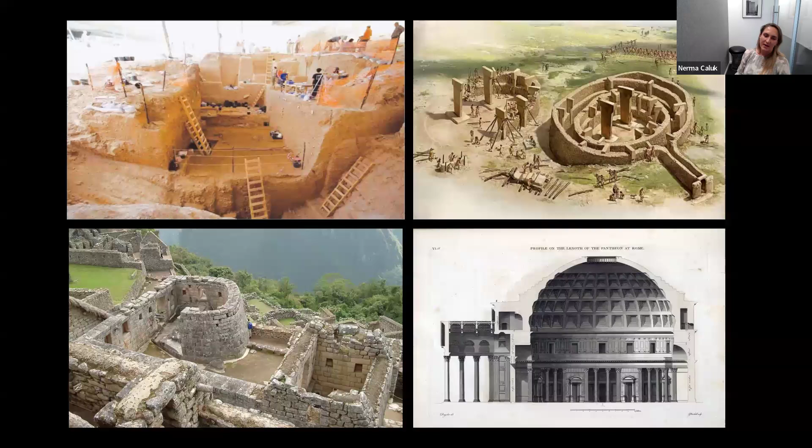Okay, so before we dive in and talk about how robots build stuff on moon bases, I want to talk about how we build things here the old-fashioned way, with blueprints, scaffolding, rebar, and very importantly, an unhealthy amount of coffee on construction sites. For thousands of years, terrestrial construction has been defined by this interplay of human ingenuity, craftsmanship, and the dynamic relationship between conceptual design and practical execution. From the limited shelters made of earth and stone to the sophisticated structures made of steel and glass that define our skylines today, especially in urban areas, our methods have continuously evolved, translating abstract architectural concepts into tangible reality.

Central to this process is a system of documentation, including the drawing plans, sections, and elevations that communicate the architectural vision, structural logic, and sequence of construction. These documents don't just describe a building and how it looks.

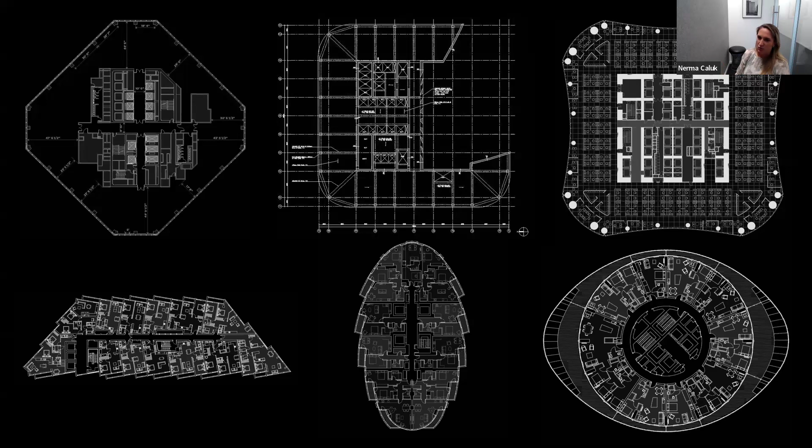They coordinate this choreography between the designer, engineer, and builder. On Earth, structural components are laid out based on these drawings, carefully measured and executed by a team of skilled laborers. Some of you are probably using robotics drawings as well for different component assemblies, or for assembly of rockets and drawing plans.

A good example is a building I'm currently working on, a couple of them actually, 5 of them in Santa Barbara. This is a perfect example of how we try to look into these plans, understand where the studios are, where the bathrooms are, where the stairs are, how everything coordinates together, and lay out the shear walls.

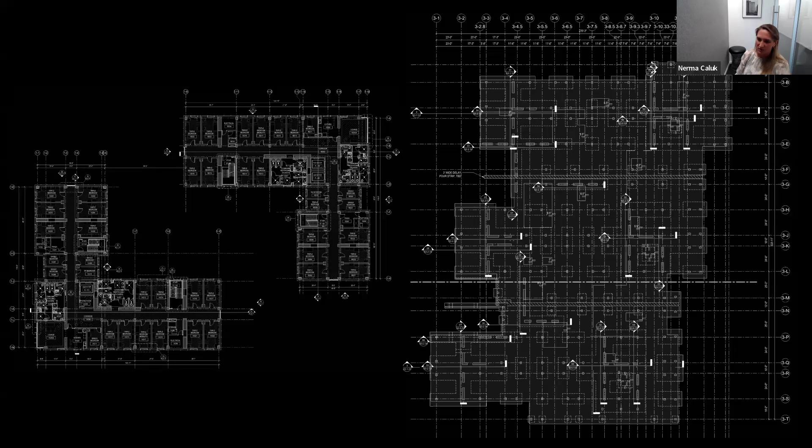We run millions of iterations, shortening shear walls by 5-inch lengths, determining where link beams will be located, and so many other components laid out on these plans, providing so much information for the actual humans to build these structures on site. But to build on site, we need temporary infrastructure like scaffolding, cranes, formwork, and so on, which serve as the physical framework that allows the building to emerge piece by piece.

Adjustments and improvisation do happen in real time. For example, a steel column can be shifted to fit an anchor bolt, or a rebar cage has to be modified due to unforeseen congestion. We build not just with precision, but with tolerance for error, because the human workforce is always present to adapt.

Sometimes the most critical tool isn't a BIM tablet we have on site, or a laser we use to measure things. It's the experience of the construction worker. It's the tape measure we use. It's a roll of duct tape.

It all depends. Construction is rarely as clean as the renderings, as you probably already know. But sometimes it does look like an actual rendering—there have been a couple of projects where I'm like, I don't know if this is an actual rendering or we actually built the structure. It represents an art form of orchestrating controlled chaos.

In many ways, we're building buildings on Earth not just through construction, but they're negotiated into place—that's how we approach these things. Over the last couple of centuries, these processes have evolved dramatically. Buildings have pushed these limits not only in scale, but also in complexity.

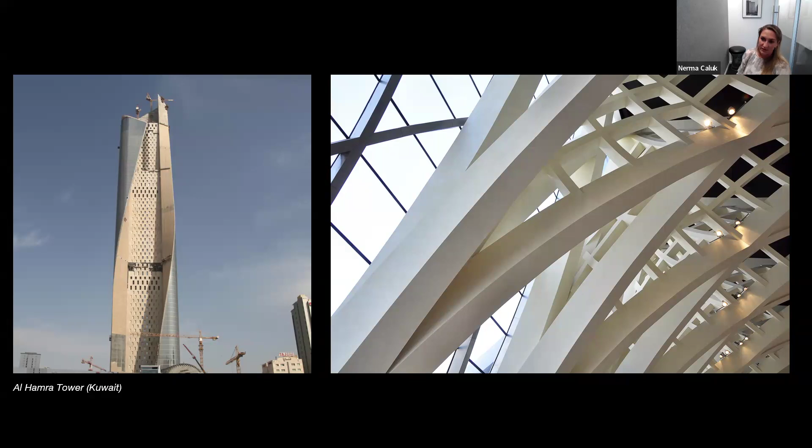An example is the Al Hamra Tower in Kuwait, a sculpted high-rise with a spiraling, carved form that requires an asymmetric load-bearing wall system, thickening dramatically along the tower spine going up to counteract lateral forces. Each floor plate is slightly different, demanding high precision layout and curved formwork, executed by a human workforce guided by both digital and tactile experience.

Another example is London's 201 Bishopsgate, where we see this interplay of large span steel frames and complex double-curved facade systems. The steel diagrids weren't just structural—they were designed to accommodate architectural transparency and pedestrian scale, demanding close collaboration between the architects, the structural engineer, and the facade consultants through the actual build.

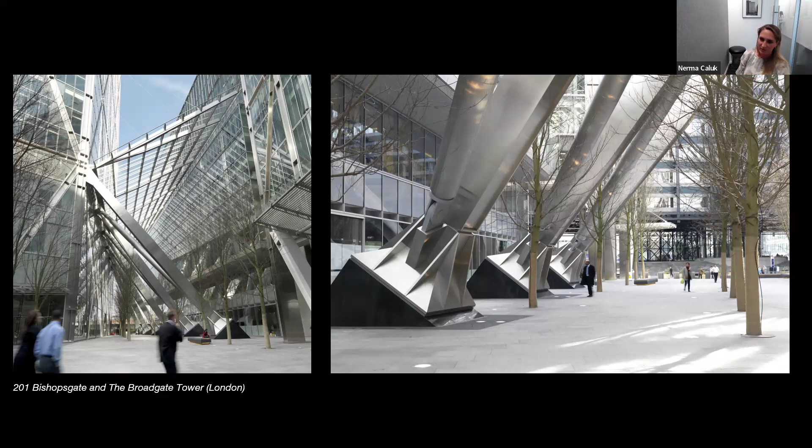This building is also located on rail tracks, so there were a lot of load combinations and load cases that had to be addressed. Tolerances were adjusted on site, and connections were hand-aligned. Again, human presence was essential.

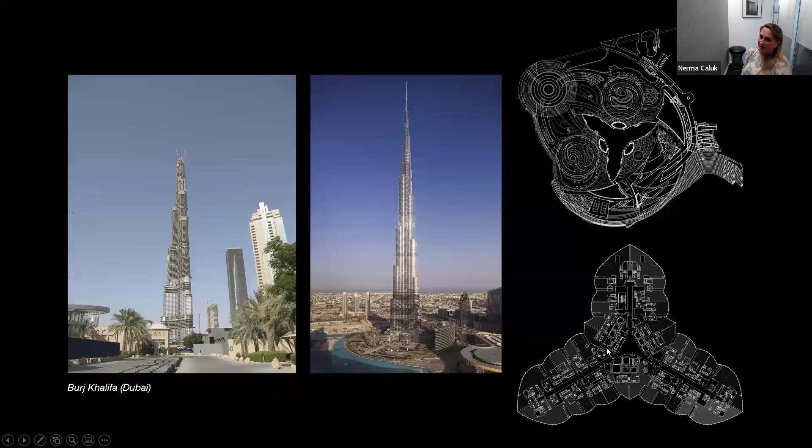At this structure at 830 meters, it required an unprecedented buttress core system to counteract the wind loads and gravity loads along its height. The high-strength concrete was pumped at record heights. The crews worked in very extreme conditions, managing thermal expansion, rebar congestion, and time-sensitive casting with precision and flexibility, and without these skilled labor forces.

They were able to make these micro decisions minute by minute. This project would not have been possible. So these and many more structures represent this apex of human-led construction, which is precise, adaptable, and also inherently grounded in this shared understanding between the disciplines that I'm going to talk about later.

So these constructions and buildings relied on presence of people on site, in the loop, and ready to respond to these physical realities of gravity, weather, material behavior, and very important, lack of caffeine. I know that very well. But this entire process assumes one thing, that we humans were there.

So what happens when the rules change? Not just with the building codes that I will talk about a little bit later, but the physics, the materials, even the presence of the construction crew. For centuries, every structure we have built has been grounded, literally and figuratively, except the ISS that goes around Earth. And we have these Earth-familiar conditions: 1G gravity, atmospheric pressure, weather patterns, readily available workforce, with tools and intuition sharpened through centuries and generations.

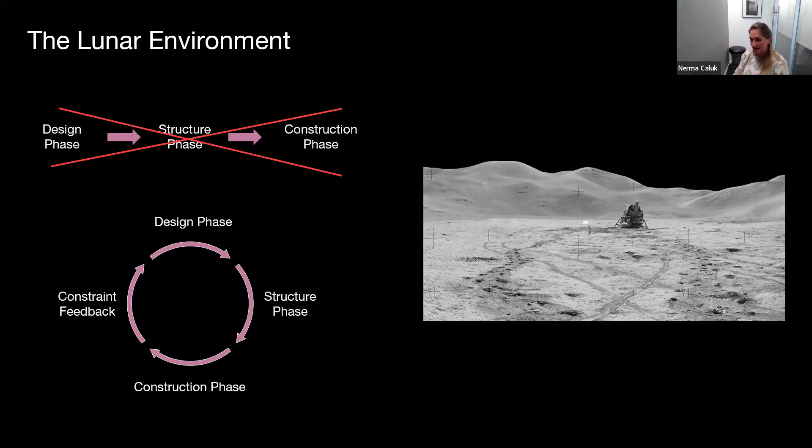To summarize what I've said in the past couple of slides: the design needs to inform the structure, the structure enables the construction, and construction constraints must feed back into design—not sequentially, but simultaneously. So the disciplines that we have separated here on Earth, as you can see on top, must now operate in a single integrated intelligence where form, fabrication, and force act in one lockstep.

So on Earth, we had the design phase, then the structure phase where we do the analysis, and then we construct the structure. But on the Moon, we have to have a kind of cycle—it's not just collaboration, but it acts more as a synergy.

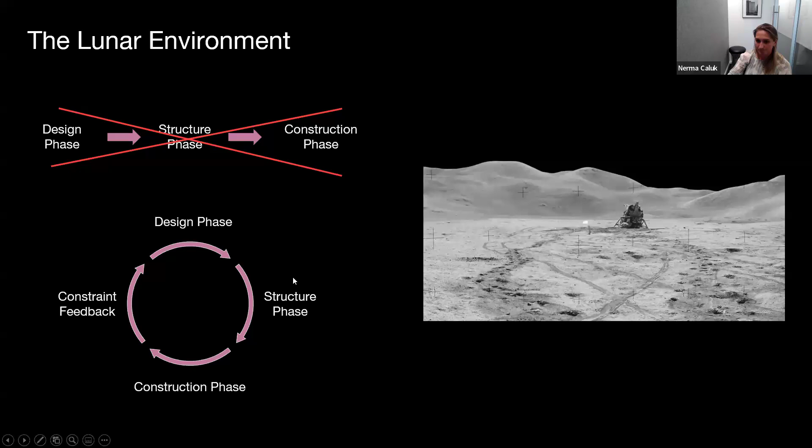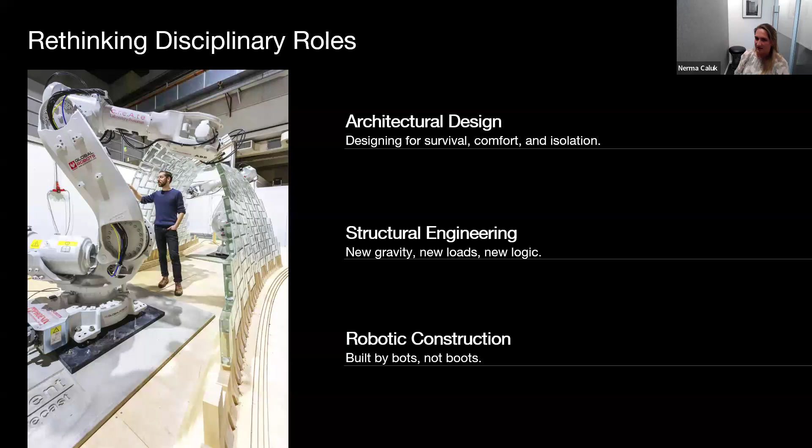As we step beyond Earth, we're not just changing the location, we are rewriting the rules of every discipline I just mentioned, and creating a new built environment. The Moon does not permit the luxury of the different disciplinary silos we have here. The boundaries between architectural, structural engineering, and construction need to dissolve into a shared framework that's integrated, resilient, and hopefully robotic. I'm going to cover each of these disciplines one by one, emphasizing their importance and how they can further adapt into one synergy.

The role of architectural design in extraterrestrial environments goes beyond mere aesthetics and spatial organization, even though it still has that role here on Earth, but it needs to be emphasized in extreme environments. It will be intended toward creating an environment that promotes health, well-being, and productivity in these challenging conditions, where light, space, color, and orientation must counteract psychological effects of isolation and sensory deprivation.

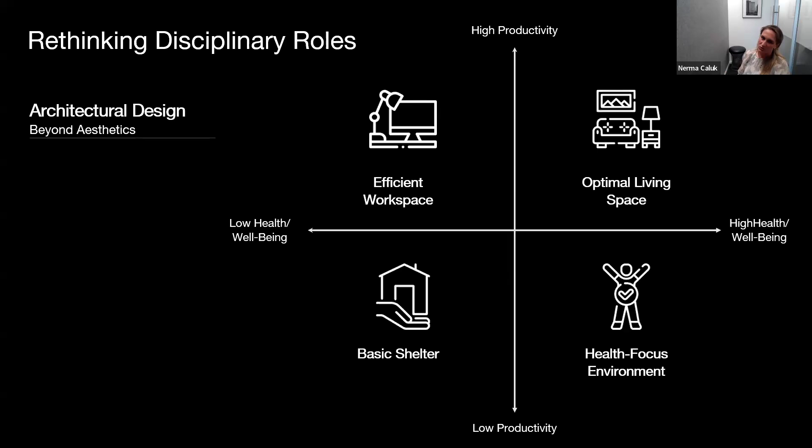Every cubic meter or foot must serve a purpose for habitation, storage, energy flows, or protection. Architecture will also need to consider factors like radiation shielding, large thermal gradients, gravity differences, atmospheric conditions, and more. The designs will need to maximize the use of local resources, whether regolith is used for construction or solar energy for power generation. These architectural innovations will ensure that lunar infrastructure, and hopefully Martian as well, can support human life while maintaining comfort and functionality.

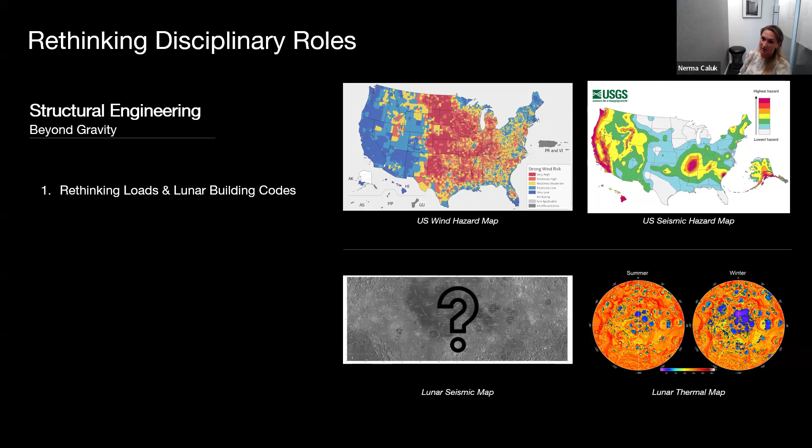Shifting gears now into structural engineering: structural design on the Moon is not really a variation of terrestrial norms, it represents a complete redefinition. Engineers must account for internal pressurization against vacuum, prolonged seismic activity, protection from meteorite impacts, and a couple others I'll mention next. Earth-based codes don't account for such different phenomena, nor for the 1/6 gravity, which alters load paths, stability thresholds, and deformation behaviors.

So how do we do this? To ensure safety, an entirely new design standard is currently under development by our ASCE Space Engineering and Construction Subcommittee for Lunar Design Loads, and I think a couple of people from that group are on this call, so I could talk about this for another 2 hours, but this is not the topic for today.

This initiative has outlined a recommended set of lunar-specified load cases and combinations for various structural systems, including dead loads, live loads, thermal, internal pressure, and so on. In parallel, we are actively identifying key knowledge gaps that, if unaddressed, may lead to conservative over-design and inefficient construction. Bridging these gaps will be critical for developing rational safety factors and achieving structural reliability without excessive mass penalties.

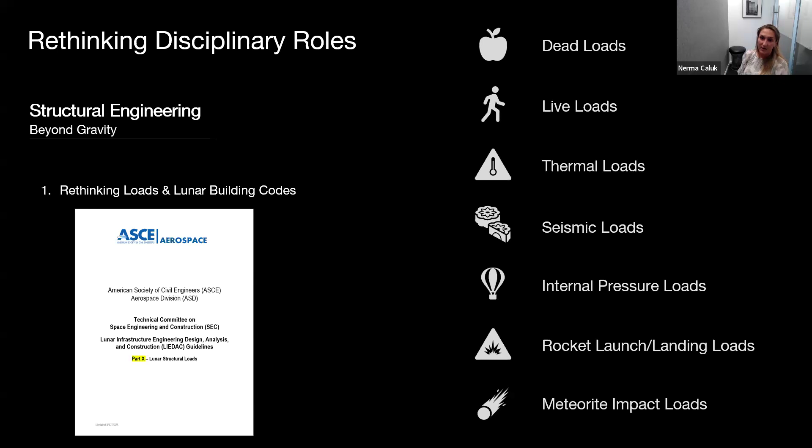Lunar structures will probably need to be designed around what the Moon can provide. We cannot just design for anything; we have to design around the parameters that are there. For example, in-situ materials like regolith aren't just a sustainability goal, they're a necessity. Engineering with regolith-based materials—sinter blocks, lunarcrete, geopolymer materials, and so on—requires rethinking load paths, favoring compressive forms, since these materials are very low in tensile strength. This means designing for brittleness, dust abrasion, while also considering fatigue limits depending on different load cases.

Optimization tools like finite element analysis and topology optimization will play a crucial role in minimizing material volume while maximizing performance at the same time. New material models, enhanced by machine learning, are currently being developed to predict long-term performance under thermal cycling, vacuum conditions, radiation, and a few other factors.

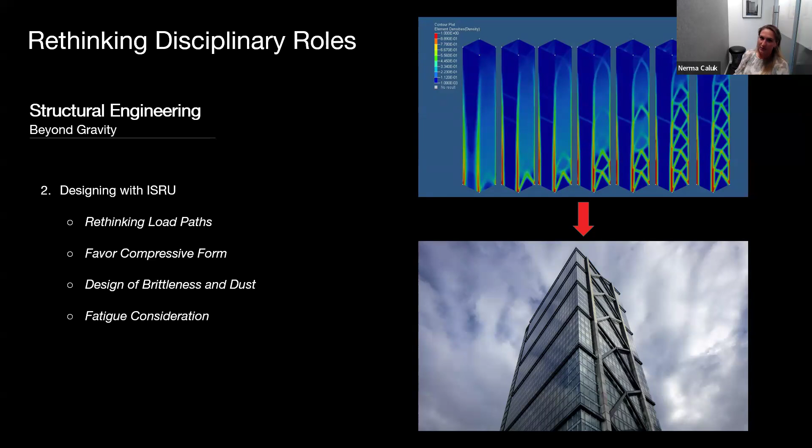A terrestrial example showing the practical use of optimization tools is the 100 Mount Street building in Australia. SOM's structural engineers developed an innovative cross-brace exoskeleton structure, visible on the facade, using topology optimization algorithms alongside classical structural analysis. The tower is highly efficient with its structural systems, featuring exposed mega bracings designed to counteract the building's torsion response while minimizing size, cost, and, importantly for Earth cases, the carbon footprint of the bracing system. So many things have been addressed simultaneously through this technology application.

Even though precision and optimization remain an ideal, they rely on environmental, material, and performance data that we don't simply have yet for the moon. We still need this data, but we cannot make this ideal.

So in the near term, the more viable and mission-aligned path is to deliberately over-design structural systems. That's my opinion at least. It's not really for elegance, but for survivability.

Every lunar structure should, and probably will, prioritize robustness over efficiency, distributing risk across redundant and sacrificial components. These initial habitats may be heavier and less efficient, but they offer a critical dual function: ensuring human safety and acting as a full-scale experiment. They'll probably be embedded with sensors that generate long-term performance data on thermal fatigue, pressurization, regolith interaction, and more, paving the way for smarter, lighter, more refined designs in the next generations.

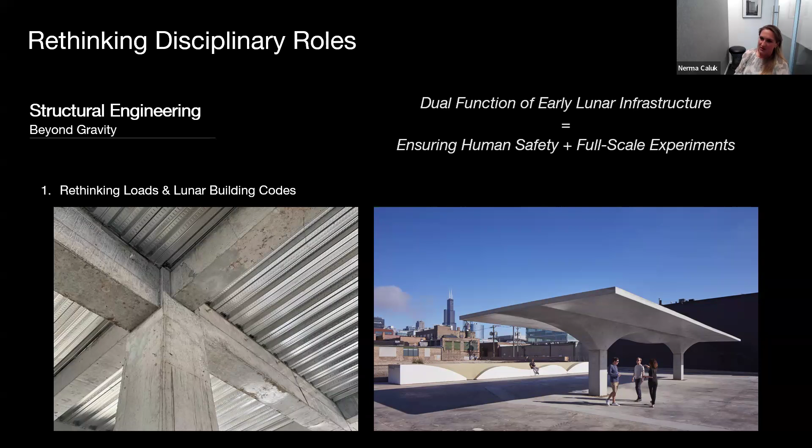In this approach, the failure of an individual component is acceptable as long as the system preserves life and learning. So we have this dual function here.

Additionally, lunar construction is not just about what gets built, it's about how it gets built, which is very important. With human labor minimized, robotic assembly takes center stage, as you can see in one example we did with Princeton University: a glass dome integrated with two robots, where humans were only involved to place the glue between each glass component.

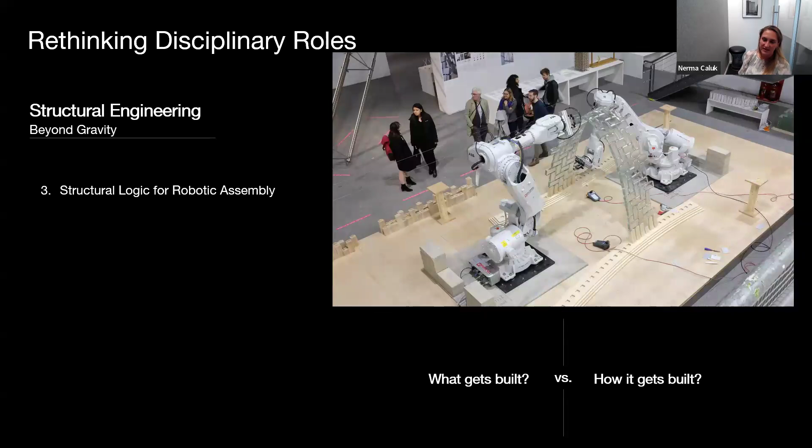This alters the structural design from the outset. Components must be modular, tolerant of robotic placement errors, and compatible with additive manufacturing or regolith-based layering techniques specific to the lunar environment.

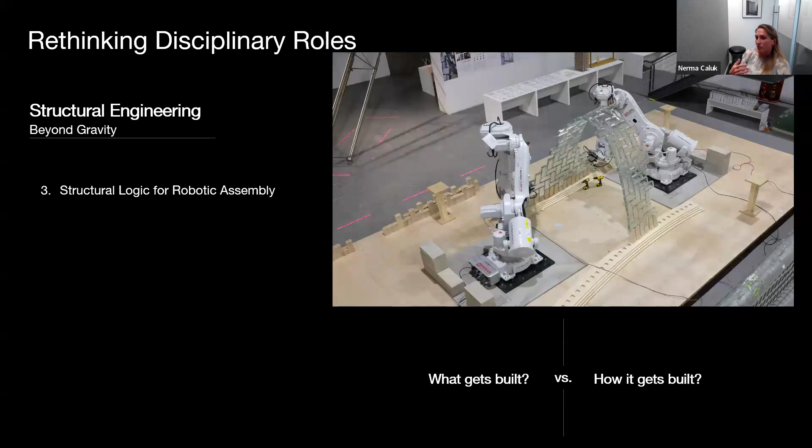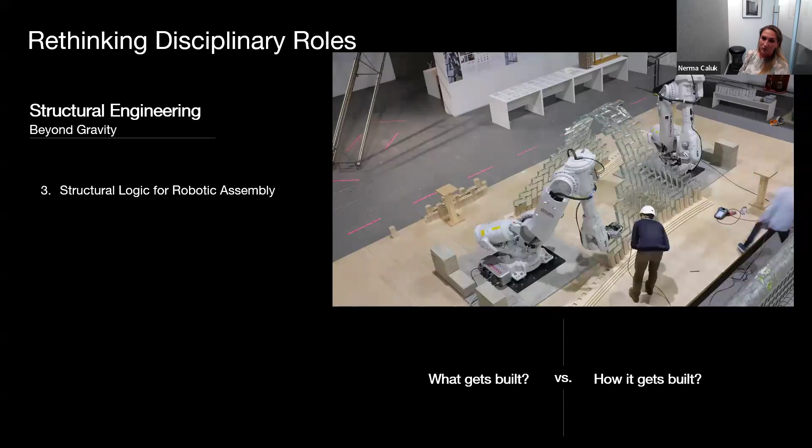The low gravity and vacuum conditions also influence construction sequences. We have to worry about stabilization during assembly, which becomes non-trivial, since structural elements may behave unpredictably without Earth's gravitational compression. These constraints demand tight coupling between structural modeling, construction simulation, and robotic planning and execution.

This ties into the last discipline I'll talk about: robotic construction. On Earth, construction is messy, but humans make it work somehow. For example, in the middle picture you have a big steel brace that a human is trying to fit together, even though we're still using robotics as cranes.

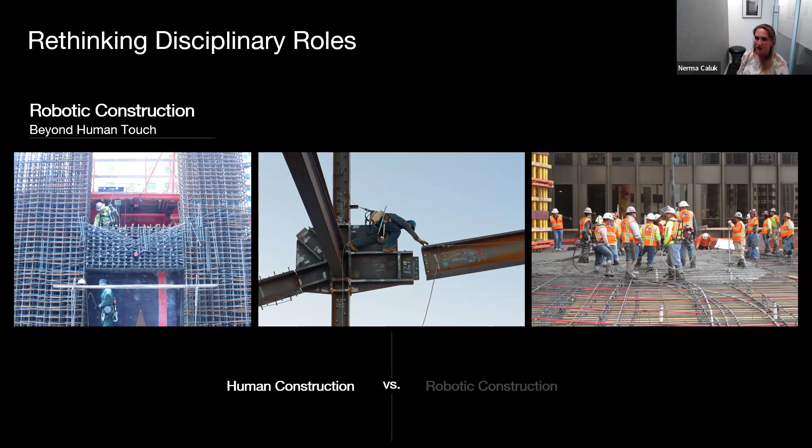On the left, you see a very congested rebar cage where these bars need to be fit together. On the right, you see many workers placing and pouring concrete, trying to see how everything fits and how the components are laid out.

On the moon, we might have a different approach. It must be clean, predictable, and machine executable. Lunar construction will most probably be carried out by autonomous and semi-autonomous robotics, teleoperated when possible, but often working independently due to communication delays, unless humans are literally in close proximity to operate them.

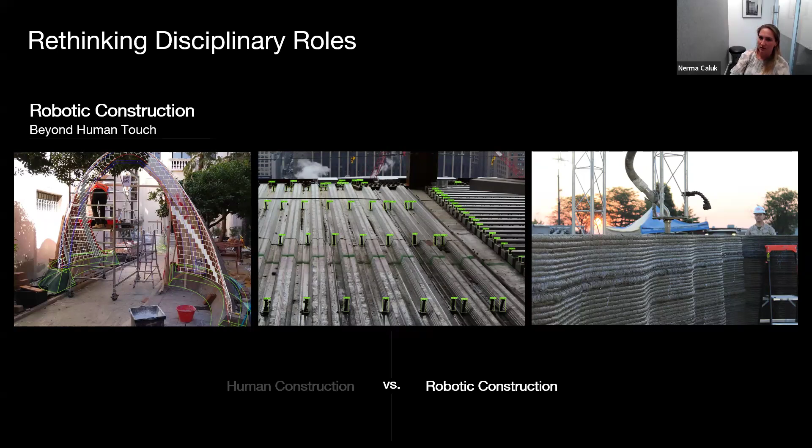But this shift to using actual robotics changes everything, right? So robotic construction ends up not being only about placing material. It becomes about managing logistics, sequencing, and redundancy, with really no hands on deck, because there are no hands to be on deck in this case.

Tasks like excavation, regolith handling, 3D printing, additive layering, and module assembly, among many other things, must all be programmed, simulated, and validated long before a single robot touches the ground.

As these boundaries combining architecture, structural engineering, and construction begin to dissolve in this lunar context, we're not just rethinking the roles, we're redefining what's possible. The traditional workflows shaped by human labor, terrestrial materials, and gravity-bound methods no longer apply. We have to reimagine these.

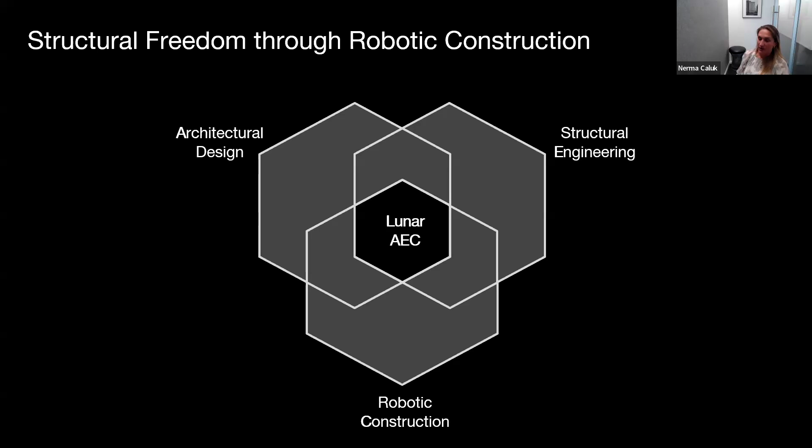With robotic systems taking over the actual act of building, we have a new design space, where structural forms are no longer dictated by human constraints, but by performance, precision, and environmental necessity. This is the realm of structural freedom through robotics, where autonomy, adaptability, and material-driven logic enable new forms and strategies that were once unthinkable on Earth. We might learn something new along the way too.

On the moon, these assumptions don't fully break down, but they do require further adaptation. Robotic construction offers a paradigm shift, replacing manual limitations with programmable precision. Instead of being boxed in by terrestrial constraints, we can explore creative structural solutions custom fitted to this extreme lunar environment, and hopefully Martian as well.

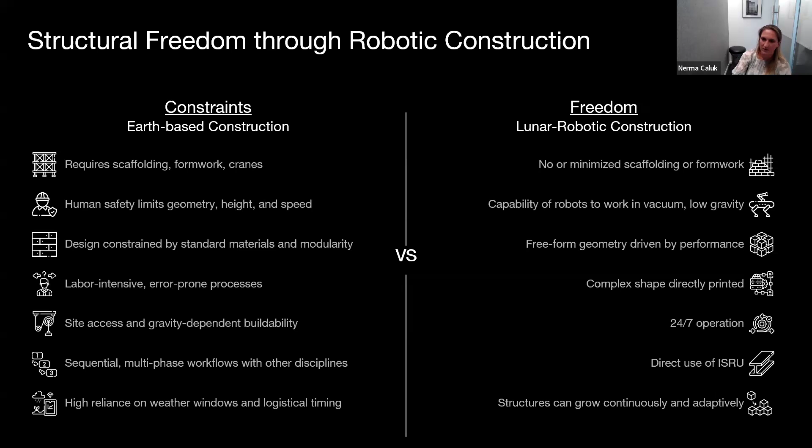I'm going to run through an example SOM did, I don't remember the exact year, a few years ago. It's called the AMIE 1.0 project, a collaboration between SOM structural engineers and architects with Oak Ridge National Laboratory, which exemplifies a balance between design freedom and materials/robotic construction in 3D printed architecture.

While robotic additive manufacturing enabled unprecedented geometrical complexity—many different shapes of 3D printing such as integrated structural ribs—in this case airflow is optimized for these curves, combined with building systems that integrate electrical, glazing, and structural elements within a single printed shell.

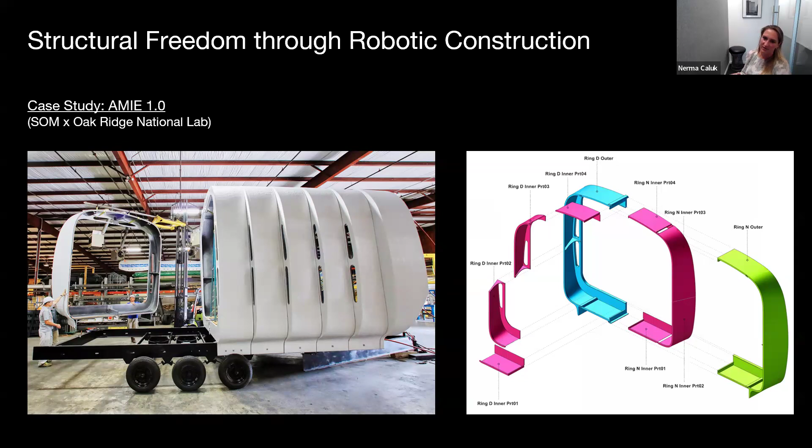The project still faced constraints from the anisotropic properties of the carbon fiber reinforced ABS plastic. I remember because I used ABS plastic during my PhD. This material has its weakness in the Z direction, the vertical, which ultimately required steel tension rods for post-tensioning.

I think it's in the next slide—yeah, right here on the left you can see those post-tensioning rods. Besides that, there was also the limitation of the printer's inability to generate support material, limited by cantilever angles of 45 degrees in order to prevent slumping.

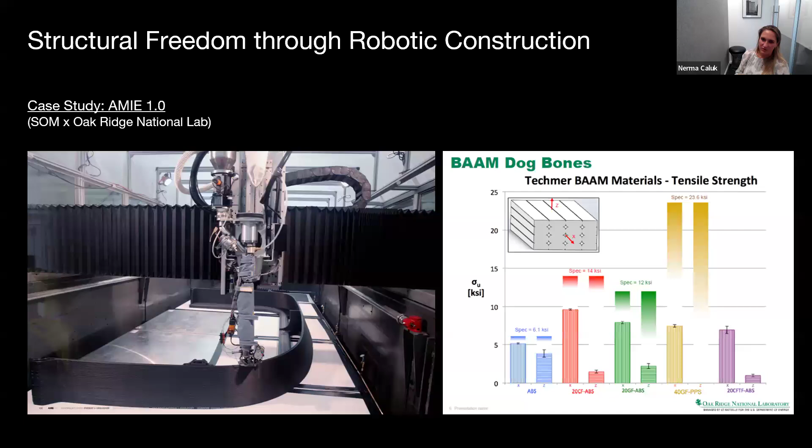Using these constraints, SOM redefined the design workflows by embracing them, using topology optimization to align load paths with the material's strong X and Y axes, while leveraging robotic precision to consolidate traditional wall assemblies into a monolithic, recyclable structure. You can see here, right on the right.

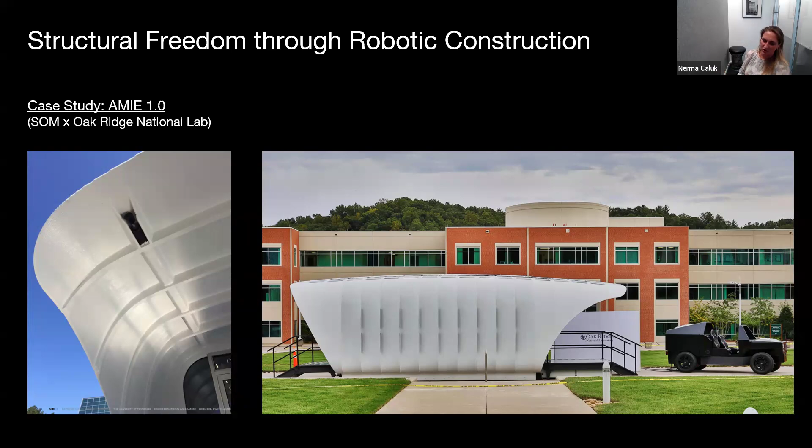This resulted in a 38-foot-long prototype demonstrating zero-waste construction, bidirectional energy sharing, and a CAD-to-system approach that bypasses the completely conventional trade partnership between design, engineering, and construction. Yeah, that was a really good example.

Combining the content so far, I'll identify a couple of key points as conclusions. We're designing for unconstrained design, not limited by human limitations. In robotic construction, workflows no longer cater to human limitation—there's a possibility we fully eliminate human construction, or minimize scaffolding, cranes, and formwork. All these components go away.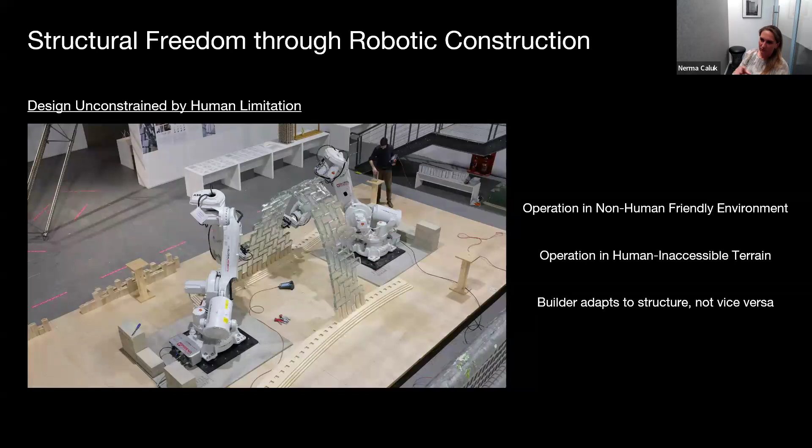Maybe not completely, but we can minimize them in certain cases—elements that typically shape structural topologies on Earth. There are additional freedoms associated with the shift from human construction to robotic construction.

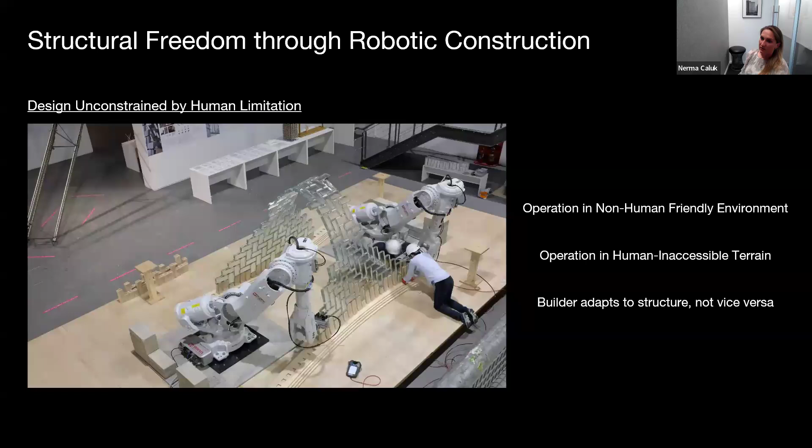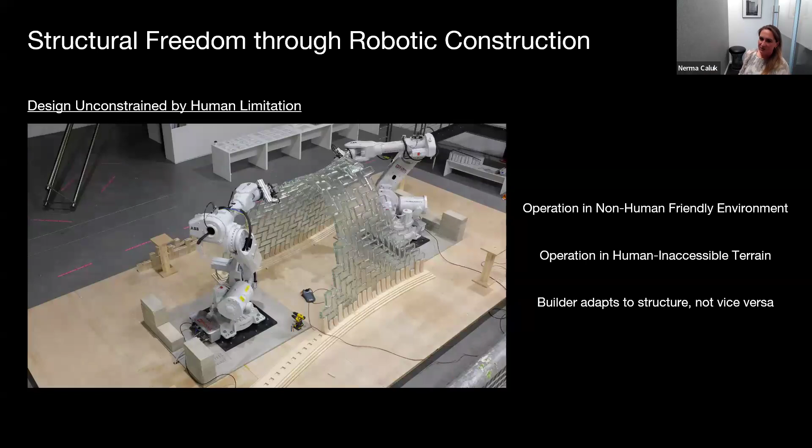These include robotic operations in lower gravity, nonlinear angles, non-pressurized vacuum environments where humans cannot operate safely. Robots can fabricate on sloped terrains, access pits and valleys while exposed to radiation and extreme thermal gradients. The structure is no longer adaptable to human builders—instead, the builder is adaptive to the structure. This mindset opens new design strategies driven by material efficiency, not constructability.

Another important consideration is the actual freedom from the traditional construction logic we are stuck with on Earth. Even if we want to redesign or reinvent new buildings, we're still stuck in this traditional construction logic. But in this case, we need to allow for new lunar structures to emerge into new forms, topology optimized not only for convenience, but for physics and performance.

Some structural components that could be designed to serve as multi-purpose elements include shells and vaults that maximize compressive strength and minimize material use, hybrid inflatables that balance structural rigidity with deployable volume, and buried structures that leverage regolith for both load distribution and radiation shielding. Just an example, there are many more.

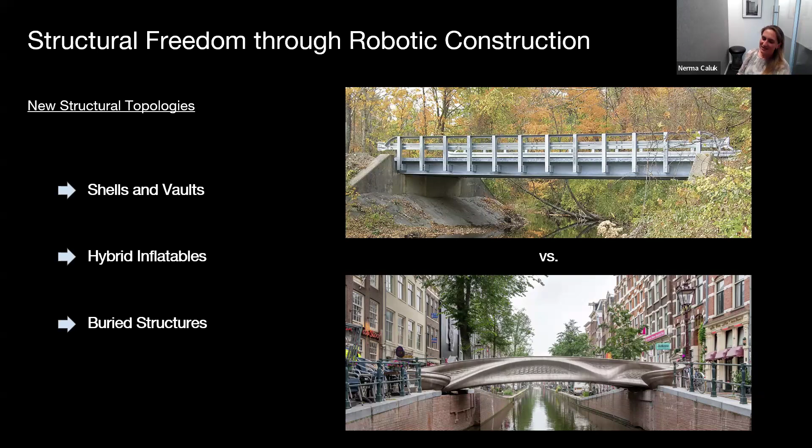These topologies would evolve not from aesthetic experimentation, but from actual structural necessity and environmental logic, which have been tested here on Earth, but we're still limited and constrained by that structural logic, as I mentioned before.

When we work with ISRU materials like sintered regolith—a perfect example, since everybody talks about sintered regolith right now—the geometry must align with the actual material behavior. Sintered regolith behaves like glass ceramic: it excels in compression, but is very brittle under tension.

So the structures will favor arches, domes, and shells with curves that distribute these loads naturally, especially given lower gravity.

Inflatable interiors offer pressure retention, while rigid regolith shells act as compressive, protective components against impacts and temperature swings, forming a hybrid envelope—so we can have this multi-layered structure as well.

In robotic construction, material characteristics shouldn't be taken as an obstacle—they're a design parameter. We try to think of it not as a problem, but as an opportunity, which some of the partners love to say here, so I get it now. In this case, form becomes a function of durability, efficiency, and the actual structural properties of the material.

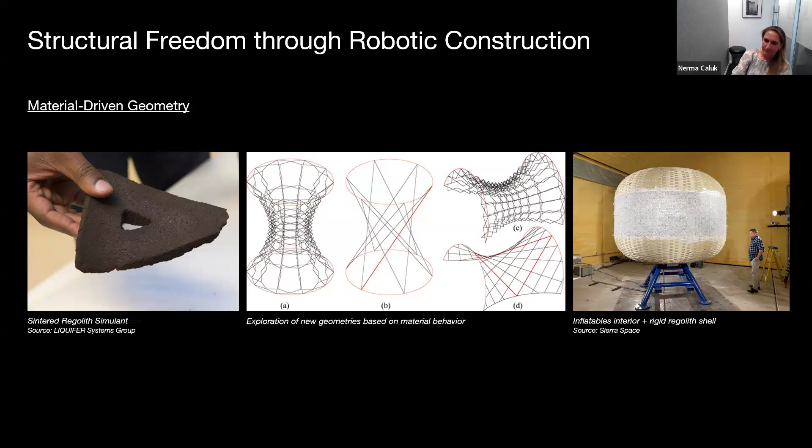I've talked a lot about this, but I'm going to try to summarize everything and see what the next steps are. So we're going back to the importance of synergy, as I mentioned in the introductory slides.

Construction is no longer linear, as I mentioned before. Disciplines are not separated—we don't have these discipline-separated processes. It represents a tightly integrated system where design, engineering, and robotics must operate in unison and uniform complexity from the start. Unlike Earth, where disciplines work in sequence, lunar missions will demand simultaneous coordination between architectural structural logistics and fabrication process.

We need a seamless design-to-robot pipeline that replaces the traditional back-and-forth workflows. There's really no tolerance for RFIs—I don't know if everyone knows, RFI is a request for information when we're providing plans to the actual construction crews.

We also need real-time feedback loops between digital models, environmental data, and robotic control, allowing the system to self-correct, adapt, and maintain fidelity to achieve whatever performance goals we've envisioned.

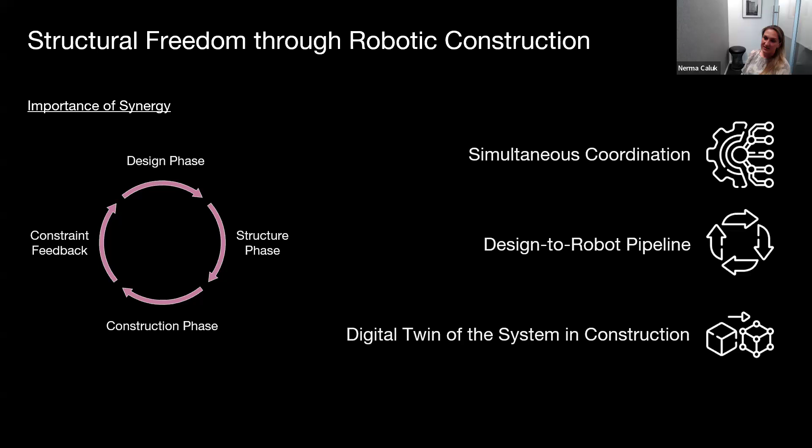So to sum up, synergy isn't a luxury—it's a foundation that makes extraterrestrial construction not only feasible, but sustainable.

On Earth is a perfect example: if we encounter a non-typical construction step, we improvise, right? But please don't tell OSHA, so it's fine. But on the Moon, the robots will stop.

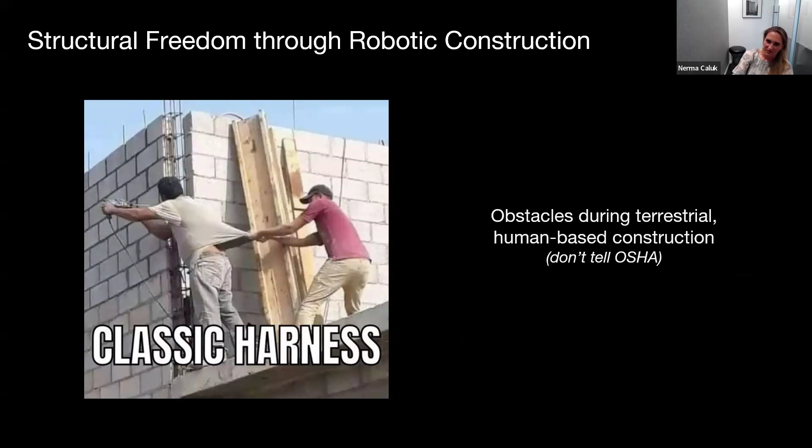This forces us to move from reactive thinking—the kind we have here on Earth, going micro-decision by micro-decision, minute to minute—to a proactive, integrated design where every part of the process informs the other.

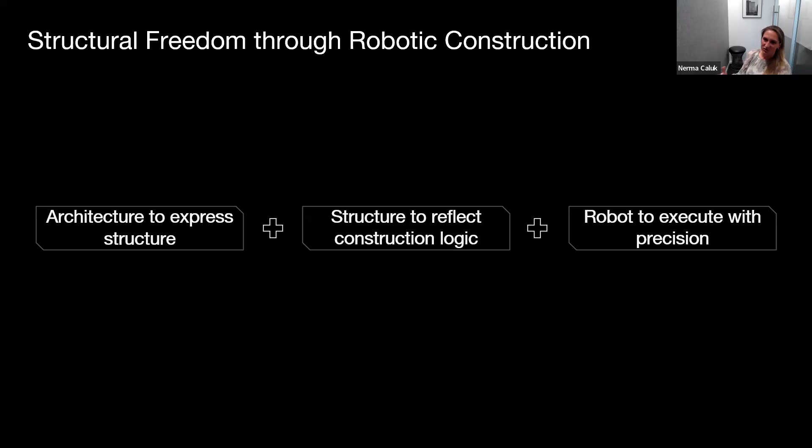The architecture must express the structure, must reflect the construction logic, and the robot must execute precisely. This represents the synergy I've been talking about, not just collaboration. As we explore these new structural possibilities unlocked by this new robotic construction, it is clear that this freedom in form is only made possible by precision in execution as well.

This is where robotics moves from being a tool we typically use just for operating and moving things around, to becoming the backbone of extraterrestrial construction. We are shifting our focus from what can we build to how can we build it, examining these robotic systems, construction strategies, and levels of autonomy that will make lunar construction not only possible, but scalable and repeatable, which is very important.

Beyond enabling these non-traditional geometries and material strategies, robots will play the role of primary builders, excavating terrain, printing structures, structural components, assembling infrastructure elements, and so on. I've tried to list out some of the most popular robotic systems currently out there that I know of, but there are many more.

I'm sorry if I didn't mention some others, but we have the NASA IPEx rover, which will be capable of excavation, moving regolith around, very important, optimized for payload weight for the lunar soil, balancing digging efficiency and mobility as well.

We have the GITAI lunar robotic with very high TRL, doing autonomous construction like an inchworm robot, equipped with grapplers. Both ends of the arm can be adapted to any type of vehicle, rover, lander, satellite, and so on. So it's very, very useful.

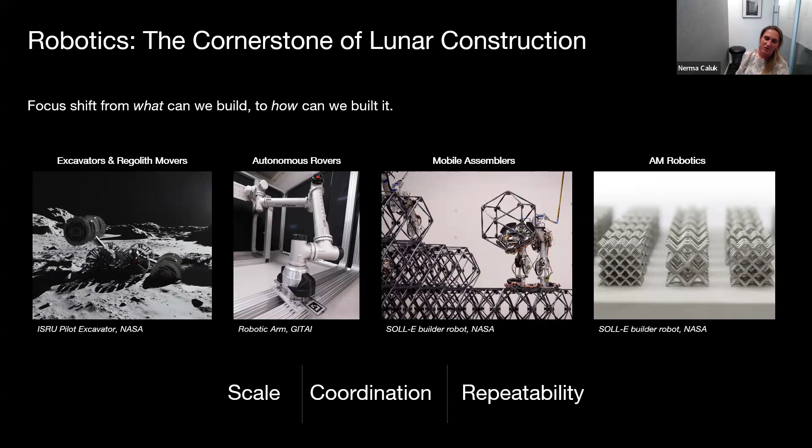I'm going to repeat this question again, maybe I didn't say it properly: are we designing the right machine, or the right systems for the machine to build? That's an important one.

To fully harness the potential of robotic construction on the Moon, and hopefully Mars, we need more than just the physical machines. We need a digital backbone that connects design, simulation, and fabrication in real time. As construction becomes more autonomous and mission critical, the tools we use to design must anticipate the tools we use to build.

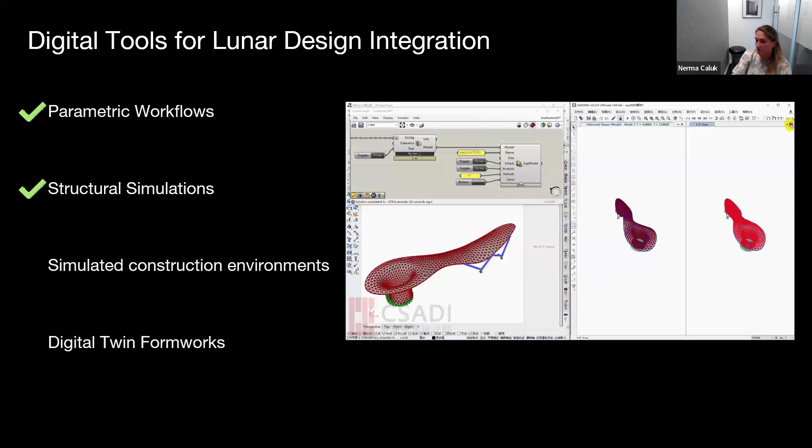Some of the key enablers, from my perspective, include parametric workflows linking the structure and fabrication process, and mission-aware structural simulations that account for lunar conditions, loading conditions, constraints, and so on.

We are addressing simulated construction environments and robotic path planning, very important because we don't have humans there to understand the load path. There's also the digital twin concept for mission planning and structural health monitoring, knowing how the structure actually behaves in real time.

While these technologies are well established in some robotic industries, as far as I know, their application in structural engineering and construction on Earth still remains limited. We need to first bridge this gap and see how we can use this to build buildings that are resilient, and efficient infrastructure that go beyond Earth, but also help develop infrastructure here as well.

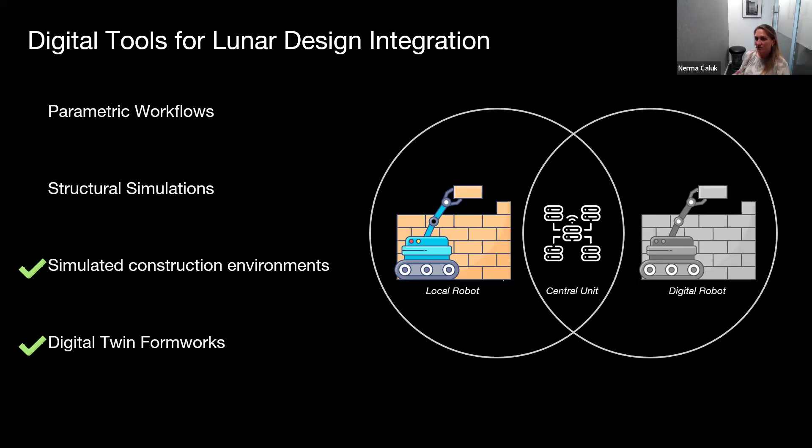As we look ahead, the path of lunar construction is filled with both complexity and promise. I know I talked a lot here, but we do face some clear challenges.

We have digital tools that don't always speak the same language across disciplines—architecture, engineering, robotics, and so on. We have communication delays that demand autonomy. There's no building codes on the moon, even though they're under development, so hopefully we can get them out soon. And we're working with strict energy and material constraints, all while relying on very limited real world data.

Yet these very challenges open up new opportunities. We have to rethink them—we cannot just take them as problems, we have to take them as opportunities. We can draw, for example, on bio-inspired designs. We can use machine learning to plan and adapt construction in real time, and also develop modular design systems that can scale across missions and environments.

As we build beyond Earth, hopefully very soon, we are not just exploring this architecture, we are reimagining it. And that's one of my favorite words right now—reimagine this full architecture, because we cannot do the same things we're doing here. So the question really becomes for everybody, I'll leave you with this: what principles of design do we need to leave behind on Earth? So let me know. Thank you.